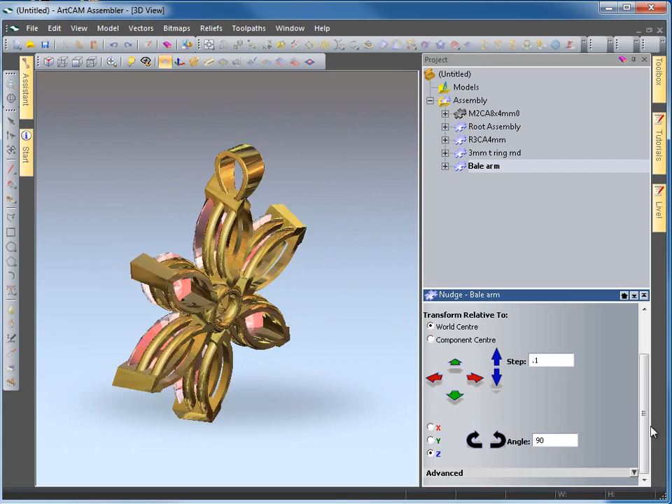Okay, we're going to open a project now inside ArtCAM. First of all we're going to go to the component library.

We're going to look at the settings option. I'm going to pick a marquise type setting for the first time. So something like this, it's 8 by 4 at the moment. We'll go for 7 by 3 or something like this and import that in.

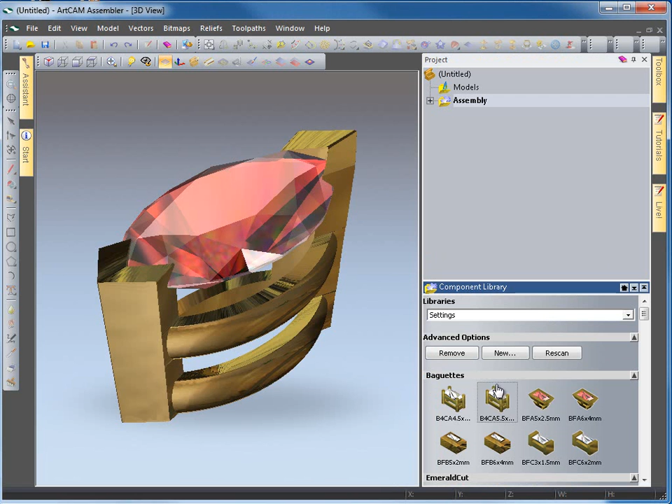Okay, I just need to scale that now, looking from the side here. I'm going to go into the top assembly. There's the model that we've just imported. I'm going to use the scale option from 4, scaling that down to 3, and apply.

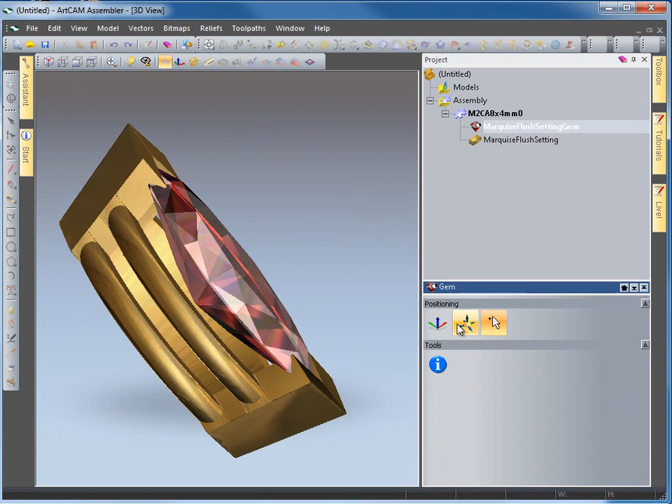I think I'll go down to the gem itself now and just change the thickness of that. That's scaled down with the model, but I really want that to stay fairly thick, so we'll say 2 millimeters. Let's just slightly move that out of place, and I'm just going to nudge that back into place, 0.1.

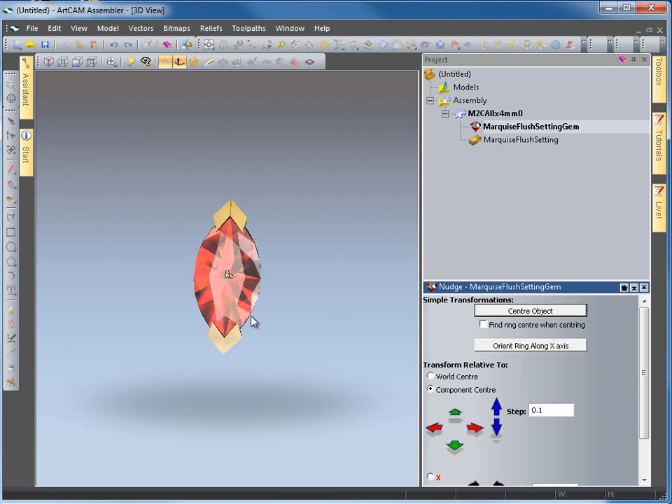Okay, and now I'm going to position this on the screen. I just need some gnomons so I know where everything is in the real world. It's base for a ring at the moment, so I'm going to return to the advanced mode and return to the world center. As soon as I press that, it'll take the whole model down to the base again, down to the 0 plane, and I can start working on the 0 plane with this model.

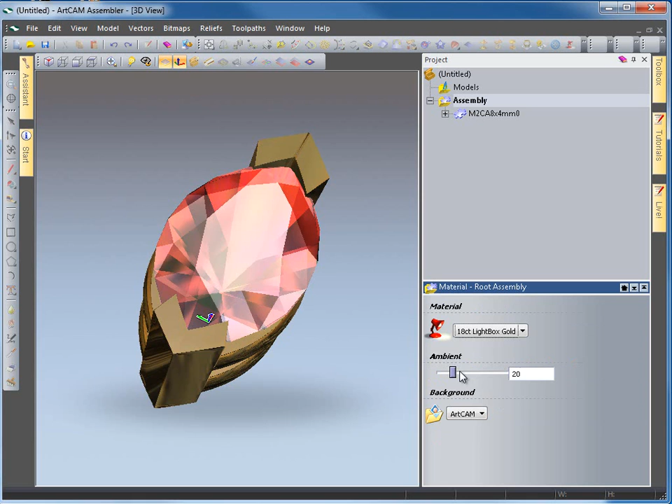Okay, let's look at the assembly folder again. I want to change the color just a little bit, more ambient light, using the material root assembly renderer. Okay, and now I'm going to just nudge that up.

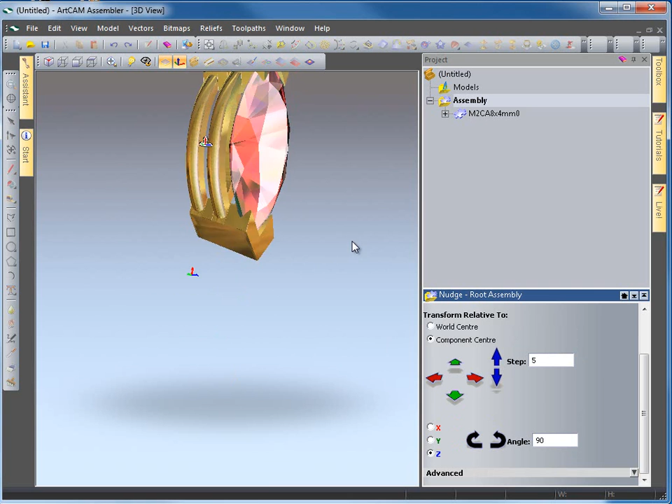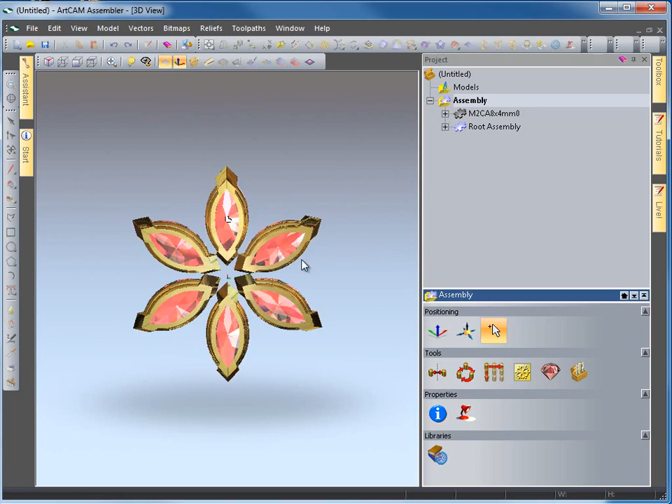So using the nudge tool again, I'm going to use, say, 5 millimeters up on the blue. That's okay. And I'm going to rotate these around at the world center. So if we use the rotation tools, copy rotate, I want 6 of these. I'm going to rotate around total at 360 around the blue, which is the Z, and tick the box. Okay, so we've got quite a complex pattern already just by assembling the component findings that we have.

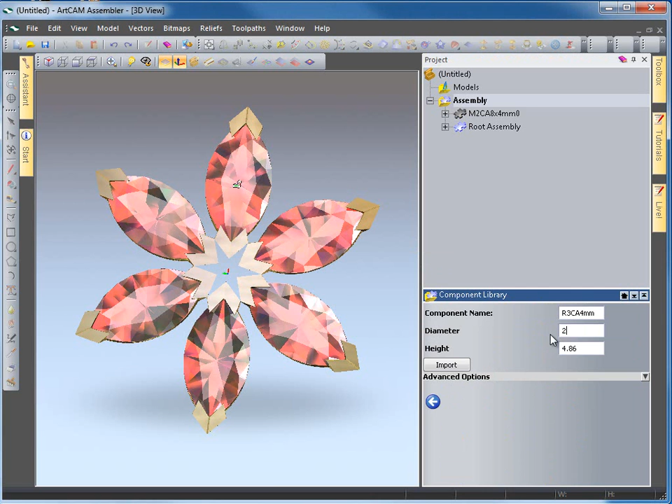I'm going to drop a little center into there, probably a diamond or something, so I'm going to have a look for that in the settings folder again. So if we go to component library, I'm going to look for something 3 claw, that'll be okay. I want that to be around about 2 millimeters wide for the diamond, and again I'm going to return that to its origin point as well.

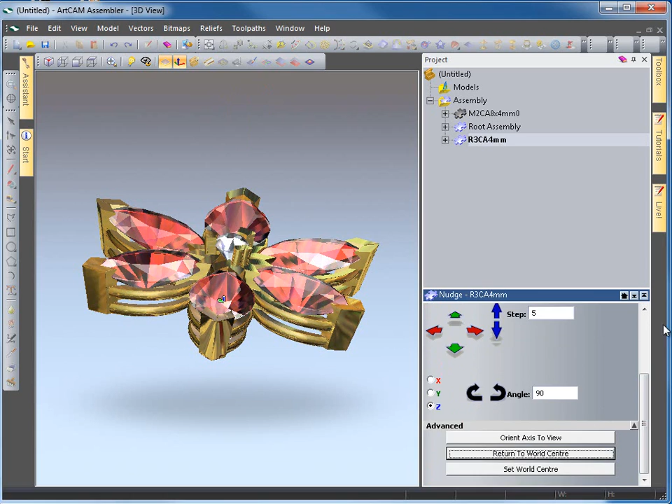So select the item. I want to go into the nudging positioning item. I'm going to go to return to world center, and let's push that setting directly straight into the middle of the little pendant that we're making now.

Okay, I'm just going to scale that slightly. It's sticking up just out of the top of the model at the moment. Let's use the scale option, scale that down to about 3.2, I think. Apply that, that'll do. Right, I need a jump ring now, or an under bezel for the back.

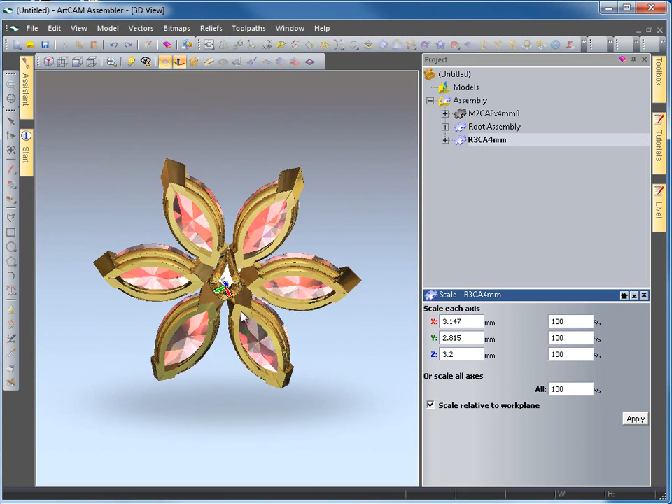So I'm going to use a jump ring from the primitives for that. So if we go into the assembly folder, look for some primitives, and we'll use probably this little jump ring here. It'll do fine, 3 millimeter, yep. And we'll scale it as we need it.

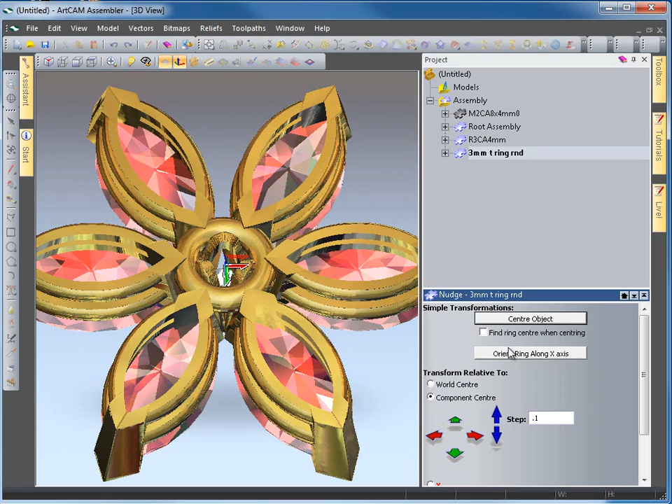Okay, I'm just going to push that now and just nudge it up, say 0.1 at a time, just into the model. That's perfect. And I'll just change that center setting again.

I'll just scale that a little so it sits inside that little under bezel. So I want it to be about 2.5, that'll do. I just need to nudge that into position now.

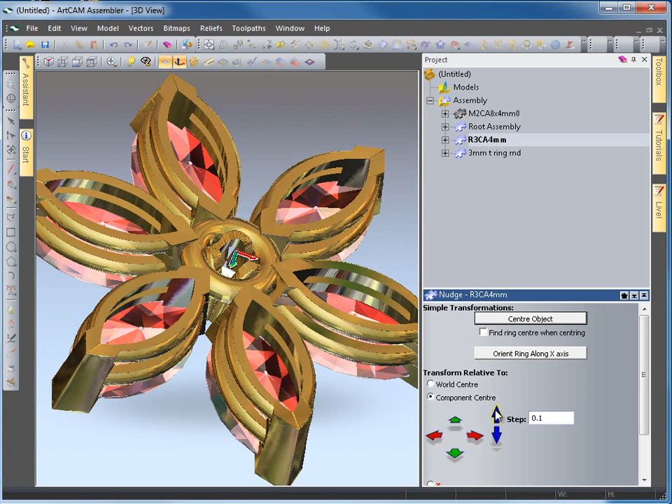Okay, I can see now from the little back bezel that's on there is that I need to just scale that down a little bit as well. So I'm going to select that next 3 millimeter jump ring. I'll scale that just in slightly. I think we'll use percentage here, so 99. If you're in doubt, just use the percentage figure. 95.

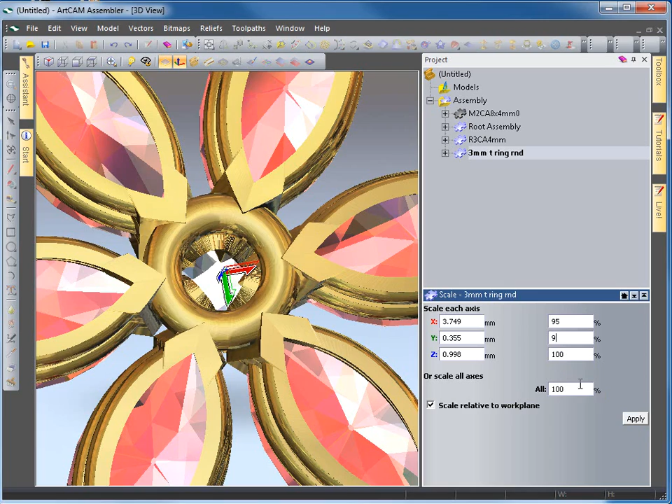That'll do. So I've retained the Z thickness, but I've just shrunk down the X and Y. Okay, that's pretty much done. I'll just take off the gnomons, and now I'm going to add a bail arm to this now from the primitives also.

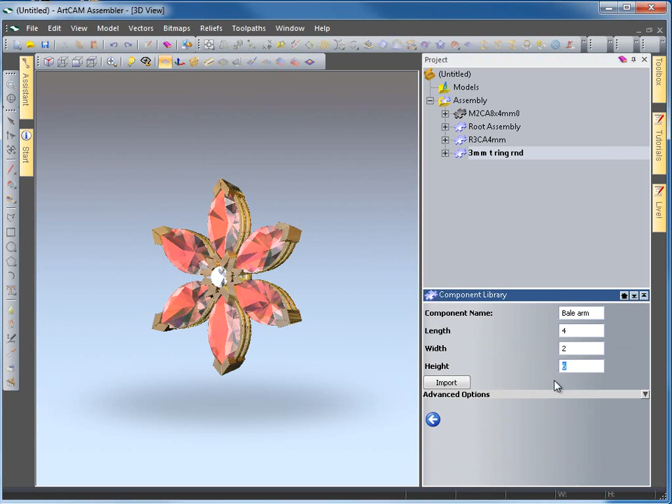So we'll just close this down, go into the component library again, Bale arm. I'm going to just change these a little, so I want 4, 2 and 3. Apply that, it's a little bit of a smaller pendant.

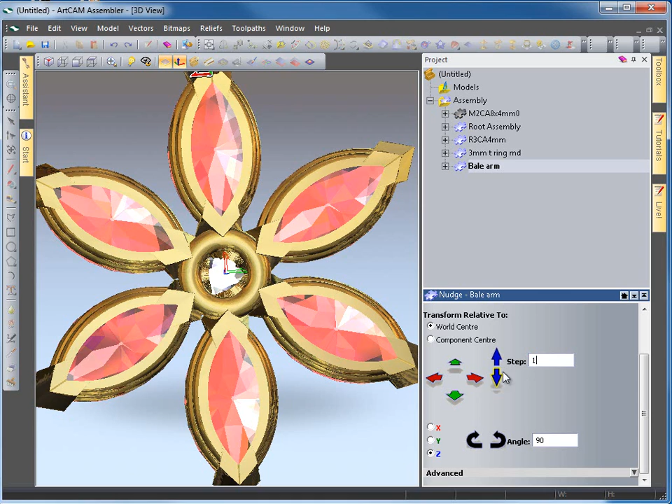I need to put the gnomon back on again now because I need to know which way this is going to be nudged. So I'm going to rotate it round now the blue so it points up towards the red, about 90 degrees. And then I'm going to nudge that up now, say 1mm at a time on the red. There we go, just nudge that into position. As you get closer, we can make finer adjustments here. I'll go for 0.1 this time and just nudge that.

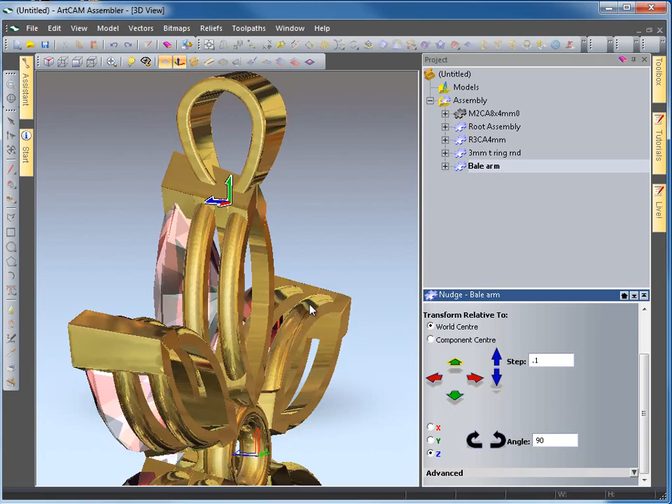I'm using the world nudge at this on the red. So fairly quickly we can get to a finished pendant without too much work really, so I don't have to start from scratch each time. And the more components that you make, the bigger your library becomes, and you can choose them. You don't have to keep remaking things each time.

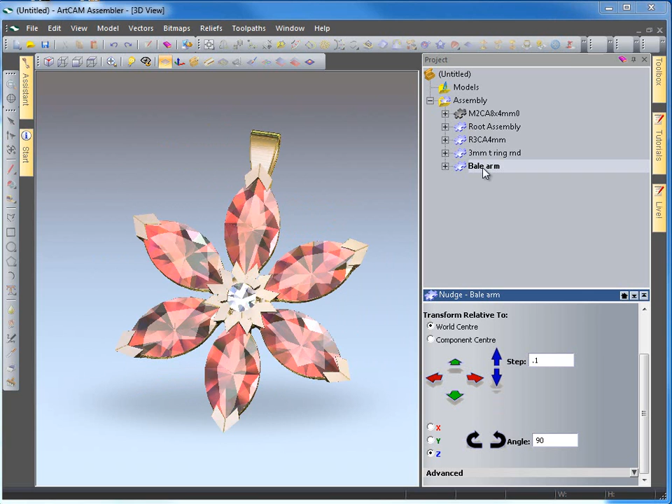Okay, well I think we'll move on to the next project. I'm going to go to settings again, and we'll load in another type of pendant. Put a little pear shape this time.

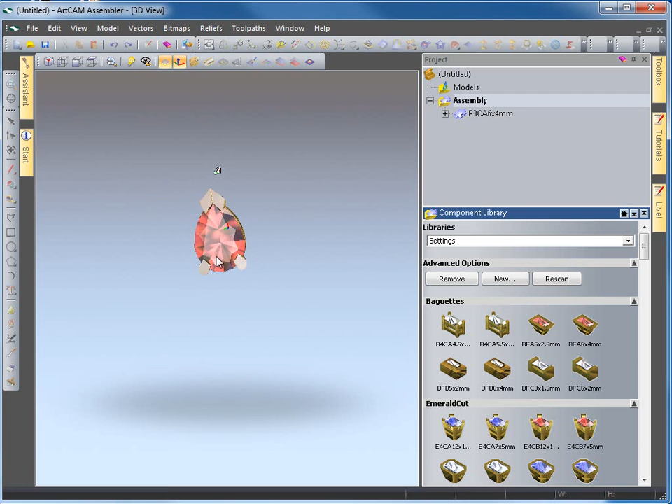I'm going to use sort of odd sizes here, so 6.4 or something. I'll do a 6.3 and then a 4.5, so just quite odd shapes. You'll probably have uncalibrated gems that you can use in this way that won't be regular sizes.

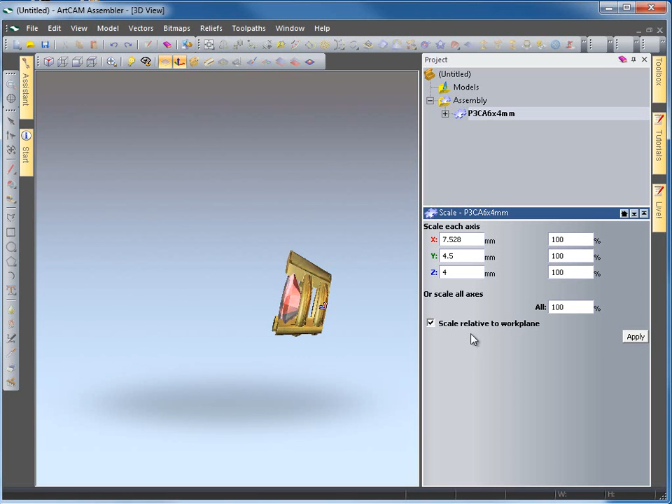Okay, I'm just going to return to world center, so it's down on the base again now on the 0 plane. I've just selected it, and now I'm going to do a scaling option here. So we'll pick this option, go for scale to about 4mm, and apply. Let's have a closer look at this model.

Yep, that looks okay, that's good. I'm just going to make sure the gem's a little bit deeper. So it's gone 1.7 at the moment, I'm going to make that 2mm. Sometimes for depth of field you need to increase these gems if you shrink the mount at all.

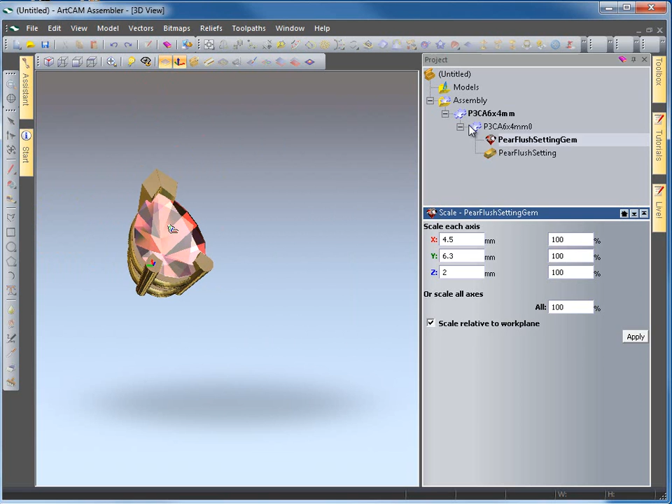Okay, sometimes when the design starts to be a bit strange, just use the top left hand corner isometric view just to put everything in line. Okay, back to component library.

We're going to pick some primitives here, probably a Bale arm first of all. I want this to be around about 4mm, so try 5, 3, and about 3 for the thickness as well. The loop's coming to the side at the moment, I'm just going to rotate that around 90 degrees.

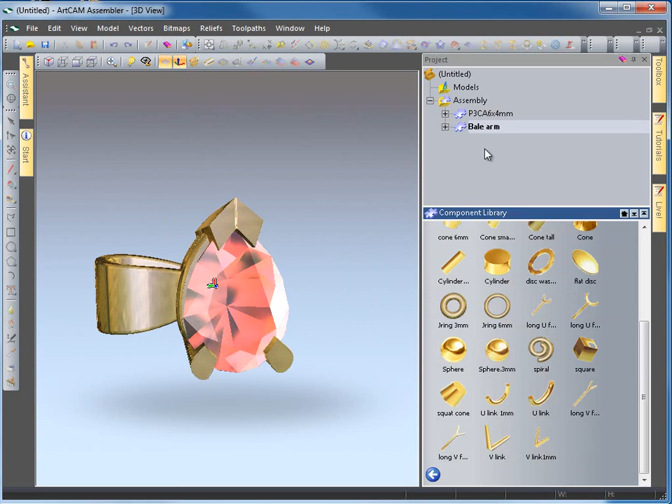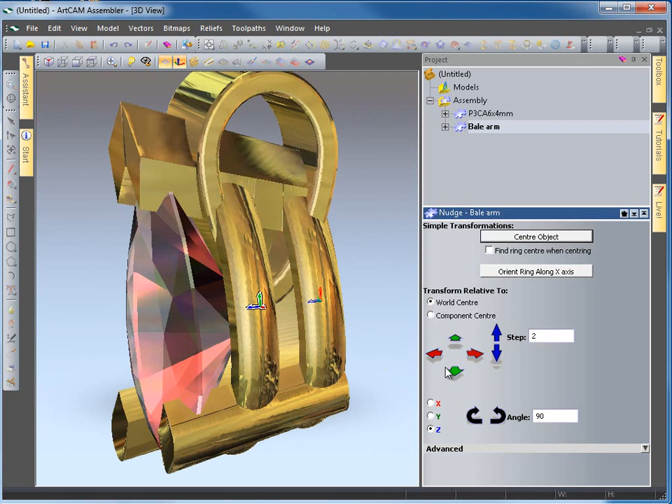Okay, and I'm going to nudge that up into position now. So I'm going to nudge it into the centre of the pendant first of all, and then I'm going to use the red option, say 2mm at a time, using the red here on the world centre, and just nudge that up into place. Again, you can use the finer detail, finer steps, just for the last little nudge. Okay, so a simple pendant with a Bale arm is really easy.

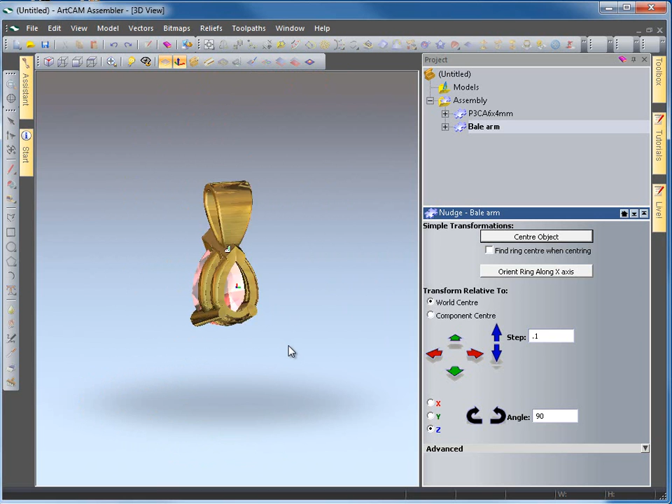You can show people, your customers, what they're going to get straight away. And you can also change the colour of this item here as well. So if you go into the assembly folder at the top of the screen here, I'm going to pick the gem itself. I'm going to use the positioning.

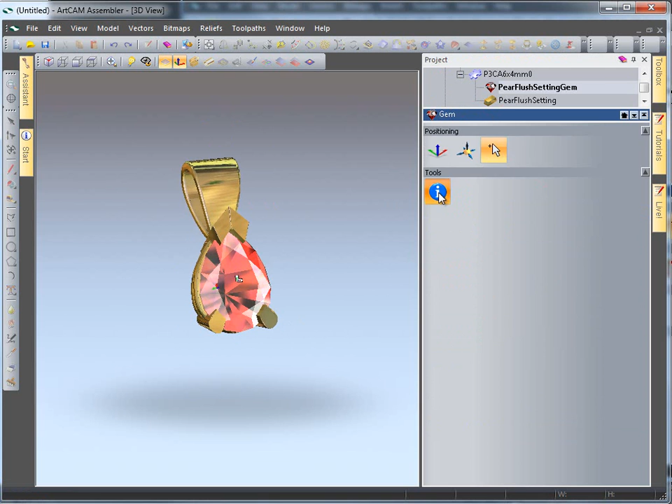I'm going to go for information this time. Okay, so edit colour, and then you can pick any colour you want really. So we can change to an amethyst very quickly. You can change to edit the colour again, or change to an emerald, or a peridot, that looks more like really.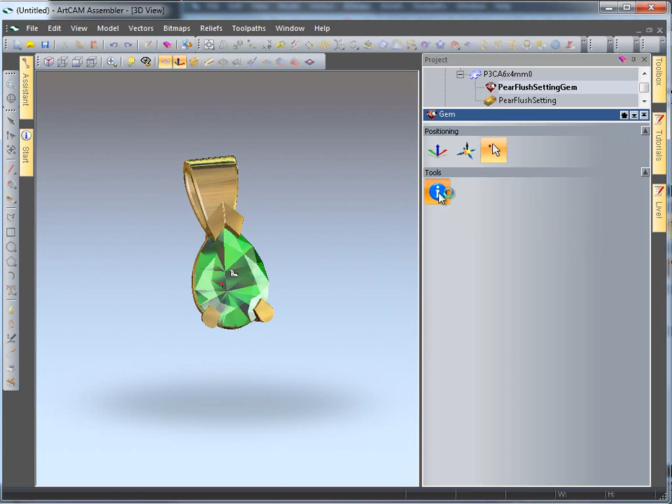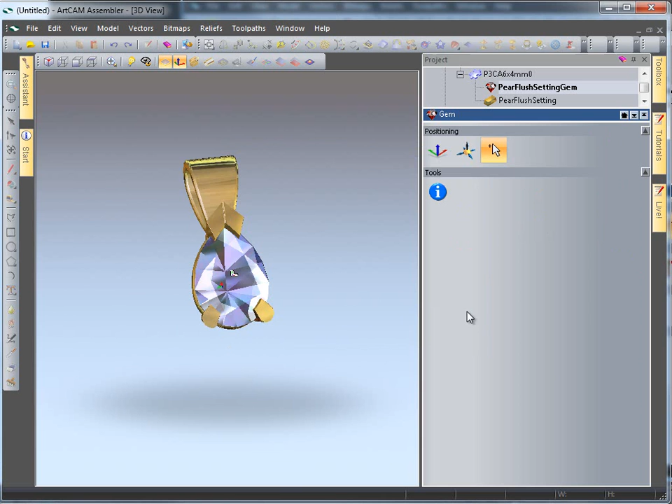But you can also change to your own colours as well. So if we want to go back into the information folder and edit, I want to change now to an aqua, or we can use the custom colour here, and you can drag the colour on that you want. So say if you've got an iolite or something like this, just drag these down here, get to roughly the colour that you're comparing the stone, roughly an iolite colour I would say, and say OK to that, and then it'll add it to the screen. So quite versatile, really, simple to do.

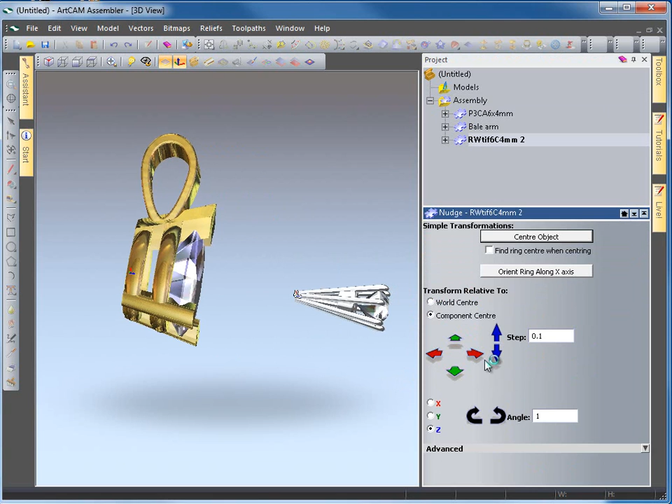Okay, we're going to add some extra components now to this to make it with some diamonds on. So I'm going to add a little Tiffany claw, say 2mm by 5mm deep. I need to return that now, in the positioning mode, I want to return it with the advanced to return to world center, so it puts it straight down the Z.

And then I'm going to start positioning, moving this around now with the nudge tools. So I want it to go somewhere near the bail arm. I'm going to have a couple of diamonds. I'll just start with a single stone first of all, right at the top. So position it in place, just need to shorten that claw.

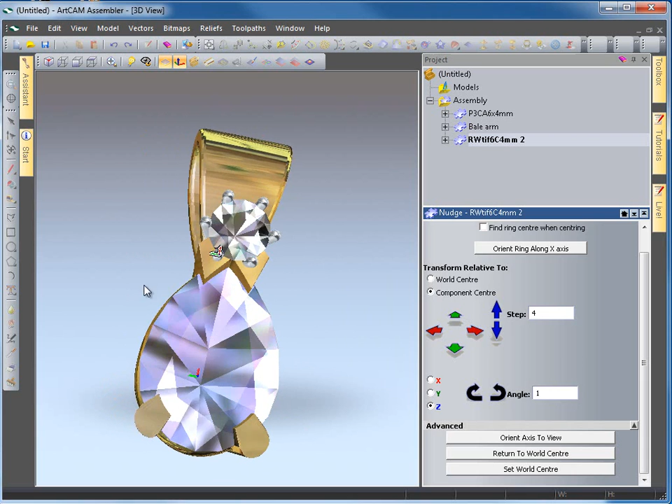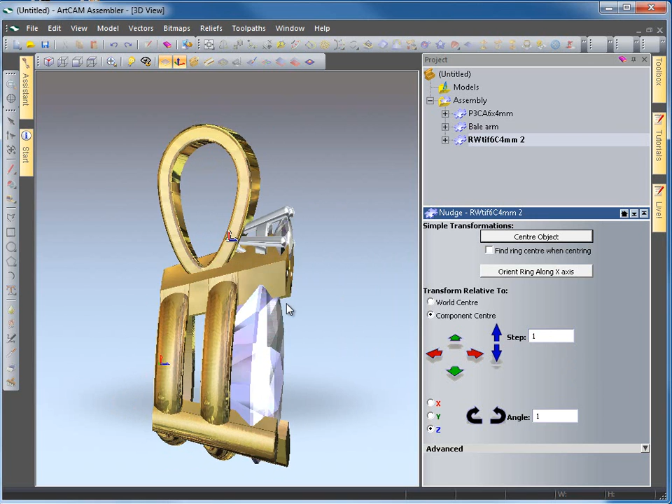So I'm going to go into the scale option. So scale, it's 5mm at the moment, 2 should be enough. A quick look at that. I just need to nudge it up into position. So using the nudge tools, that's too high, say 1mm, nudge it back down again, okay. Probably just a little bit, nudge it just a little bit higher. So 0.1 at a time, just clear of that claw.

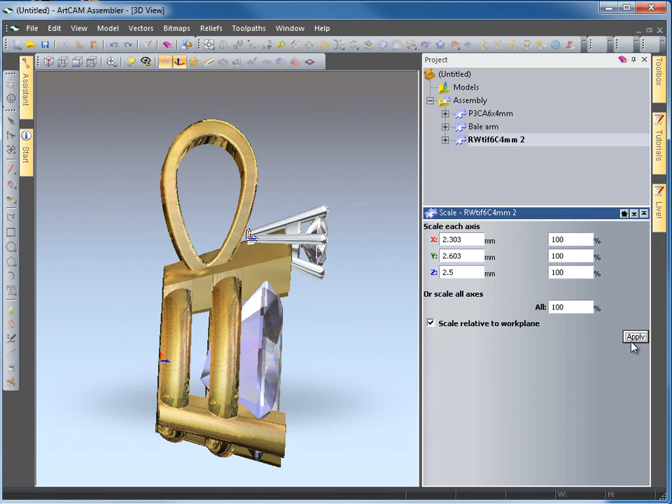I'll go to the scale option again. I'm going to scale that, it's 2 at the moment, I want 2.5, and then I'll just nudge that, push it back down again with the nudge options.

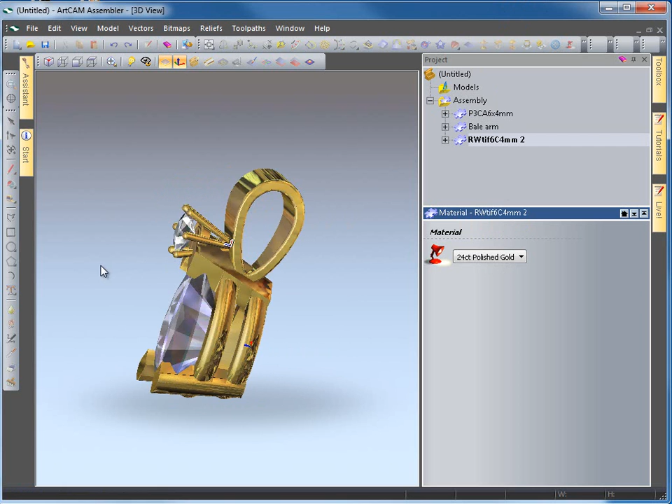Okay, we just need to change the colour now so it matches the gold colour that's on the pendant already. Okay, so that matches too as well. So a single stone with a single diamond, a coloured stone and a bail arm, fairly quite simple.

Okay, the next thing we're going to do is move those diamonds around, so you can have a couple of diamonds either side of the bail arm, using some of the different tools for rotating around the world centre and the component centre.

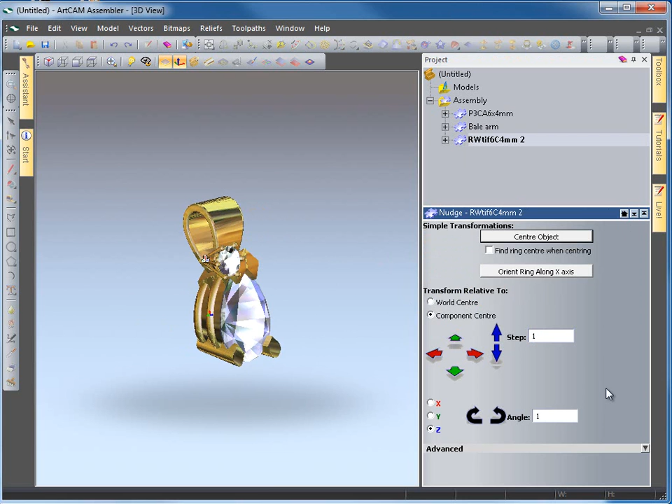So I'm just going to nudge that now to the left slightly, and then down, and make the whole thing a little bit longer as well. So nudge it down roughly into position first of all. That's okay.

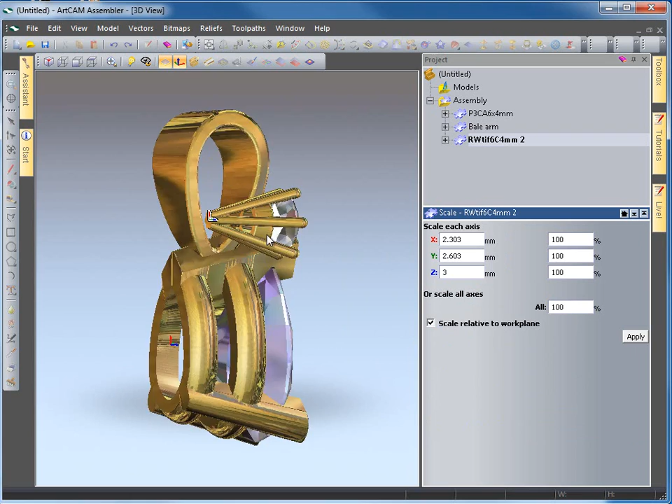And I'm going to use the scale option. It's 2.5 at the moment. Let's try 3. Probably need a bit more fine adjustment.

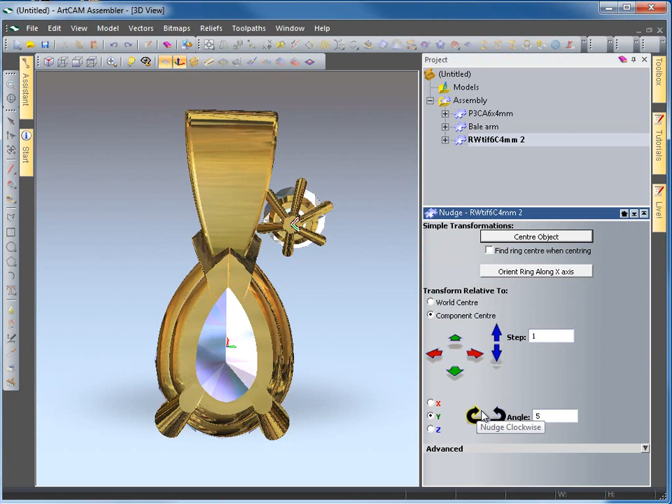I'm just going to rotate that around now on its component centre this time. So pick component centre, and we're going to rotate round at about 5 degrees at a time. I want to make it easy for me to rotate this into the pendant from this angle. So that's okay, and I'll rotate on the green itself. So I'm rotating around the component centre, just turning that round.

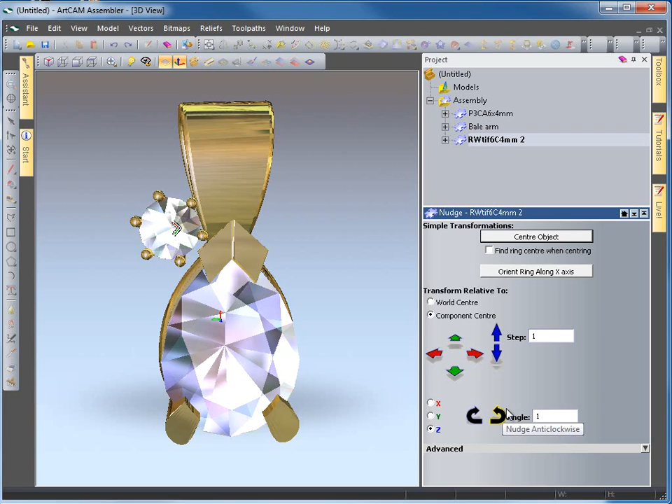And then I'm going to nudge and push that closer to the model, using the component nudge key, nudge arrow as well. I'm just going to rotate that round so those claws fit a little bit better, and then push that again.

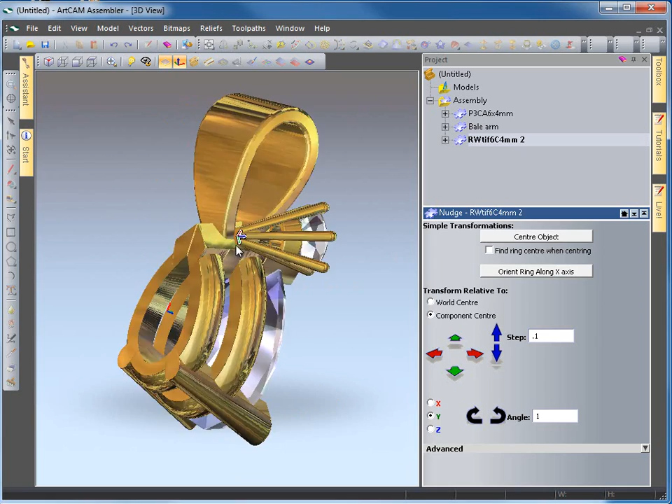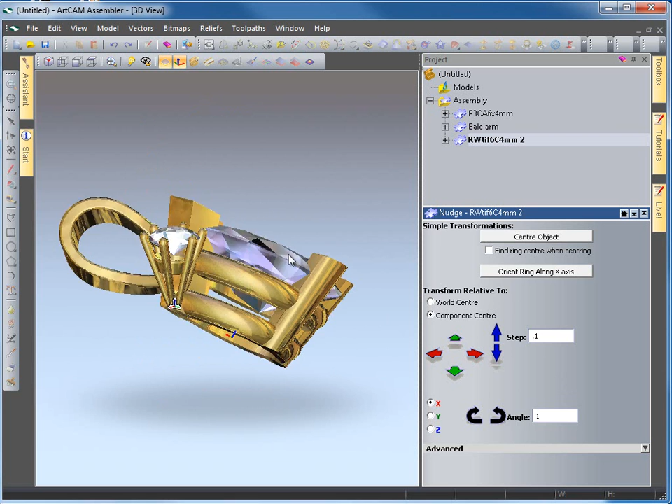I'll rotate a little bit more on the Y first, and 0.1 at a time, so fine movements this time now, just pushing it towards the collet. We'll rotate around the Y a little bit more, a bit further out, and then push it down again, just nudge it into place. Now I'm coming down on the blue, just to nudge it down a bit further, on the Z, and we'll just have a quick look from the top.

But I'm going to change this top bezel first, because it's in the wrong place here, so I'm going to make it just a bit deeper, so it's 0.6 at the moment, I'll make it 0.7. And I'll just nudge that down just slightly.

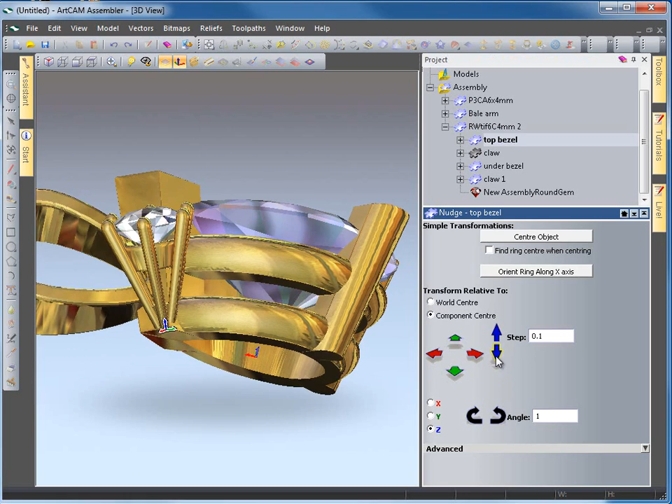So you can get to most parts of the pendant and change it as you wish as you go along, you don't have to go from scratch again. Okay, the bottom bezel I'm going to make a little bit thicker, so 0.8, so it stands a chance to survive when we're making it or building it.

And I'm just going to deal with the claws now at the top. So we've got 6 at the moment, I only want probably 3 of those, so I'm going to just hide those. It's going to be the simplest way at the moment, just take away the ones that I don't want. I'm just hiding them so they're still there, I'm just not deleting them.

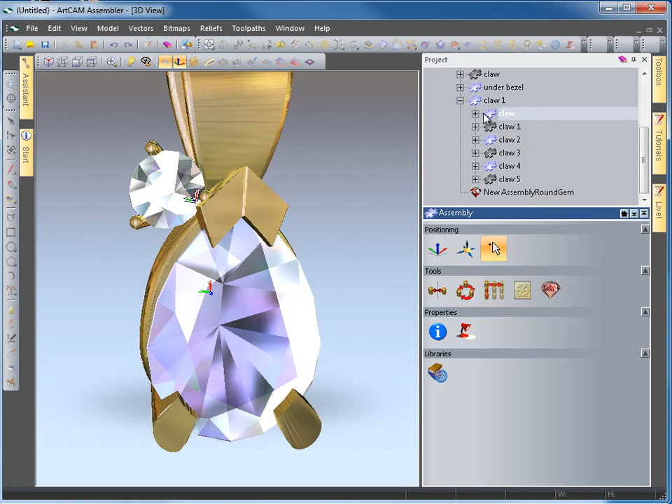That looks a bit odd, so let me just change one of those around. Show that one, and I think we hide the next one, claw one. So we've got a little 3 claw setting there now holding that single stone. And I'm just going to go back up to the top level and just rotate that round so those claws fit a little bit better.

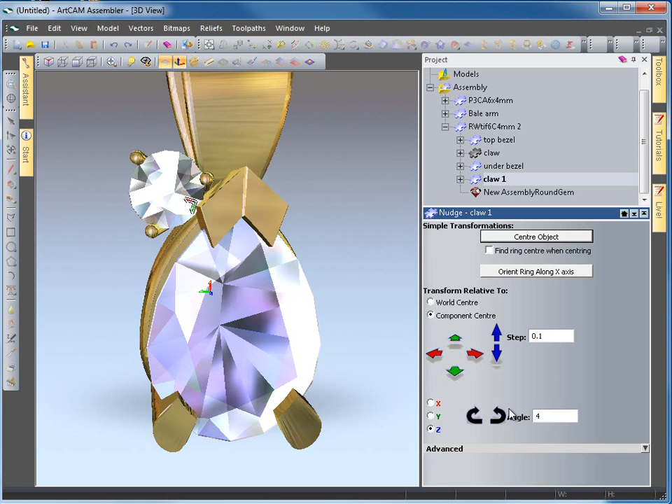So the nudge tool, we're going to the angle rotation, 1 degree at a time. Probably make that a bit faster, let's go about 4. And that'll do. Okay, I'm ready now, I think, just to mirror that across to the other side.

So they've got 2 diamonds with all the claws and settings pushed together. So I'll go to the top level, use the mirror tool this time in components. I'm going to mirror across the blue red and apply.

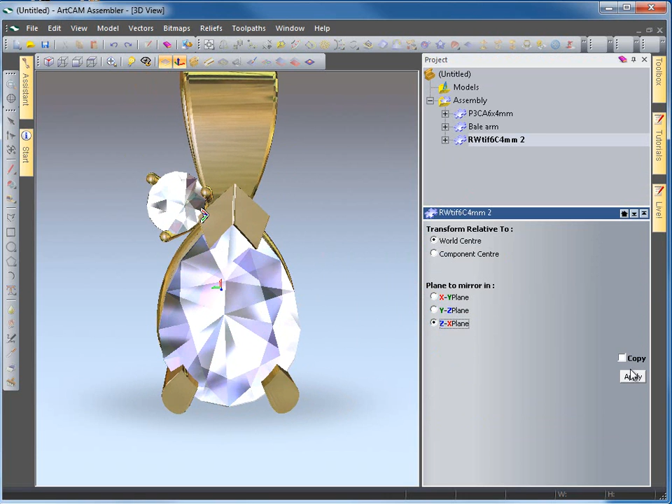There we go. Okay, if we can change the colour, it looks a little bit faded out here, so I'm going to go back into the pendant now and change that back to probably a sapphire or something, make it look a bit deeper. That's a better, deeper colour.

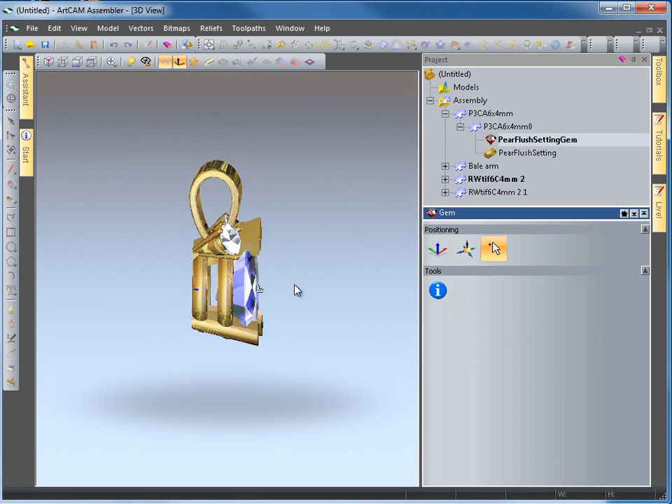Okay, you can see how it is possible to quickly assemble items from the component libraries, so findings, different settings, how to change the settings, how to scale them, how to change the colour of the gems, and put them all together in one finished item.

We have a couple more demonstrations in the assembler range, one to deal with gemstone rings, another one to deal with signet rings.